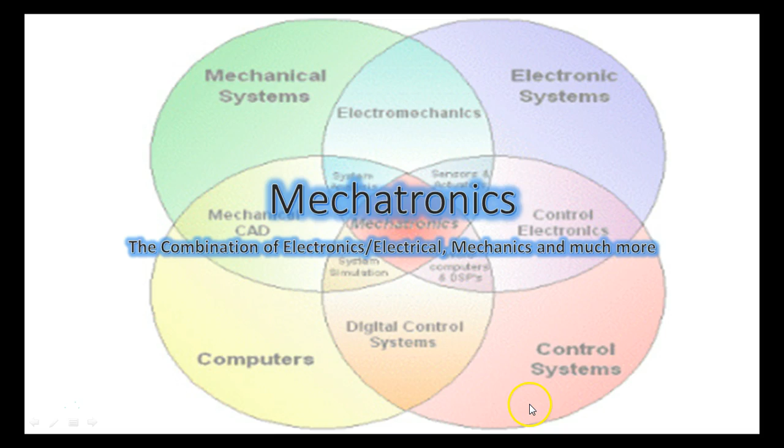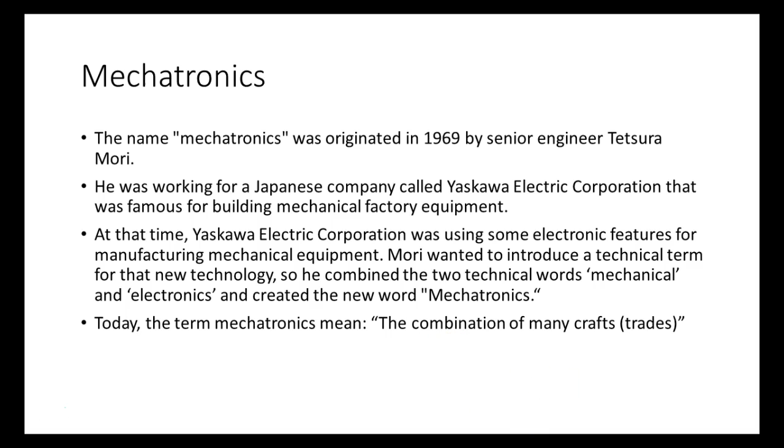So this is a little history. It was originated by Mr. Mori, from a Japanese company that dealt with electronics and mechanics. He was the first one to come up with this word. So originally that's what mechatronics was, a combination of mechanics and electronics. But it basically means it's a combination of a lot of many crafts, or trades.

So this is a cleaner one — this is the actual official logo for mechatronics. It consists of control systems, computers, digital systems, control electronics, electronic systems, electromechanical and mechanical systems, and CAD.

The only thing that we don't do in this class is CAD. You know what CAD is? What does CAD stand for? Computer aided design. 3D printers would be part of 3D modeling, which would be a part of designing with computers.

Used to, when I was in college and we took drafting, it was on paper and pencil. I remember when the college got its first CAD computer, and now you do all your drawing on a computer — it takes care of a lot of stuff for you.

It's one of the softwares they have to do the printers up there. Yeah, it's like a touch screen — you can scan stuff with it and then have a 3D model and rotate it, expand it. We were donated one, but we haven't got it going yet — a little Delta 3D printer over there. Yeah, it's a real neat one. It was given to us, but we don't have the software application to run it yet.

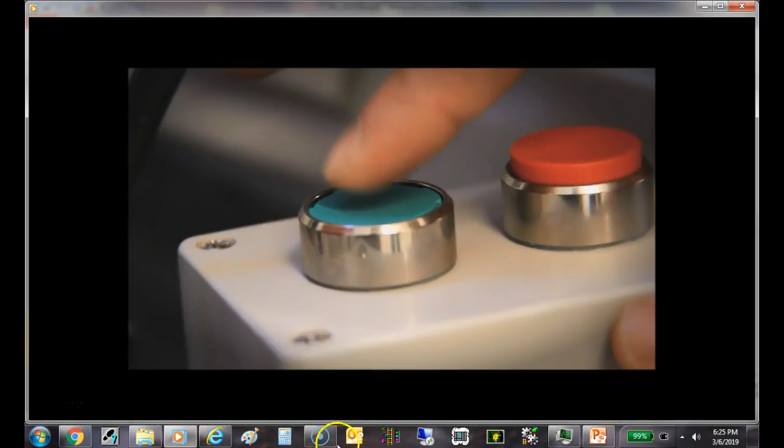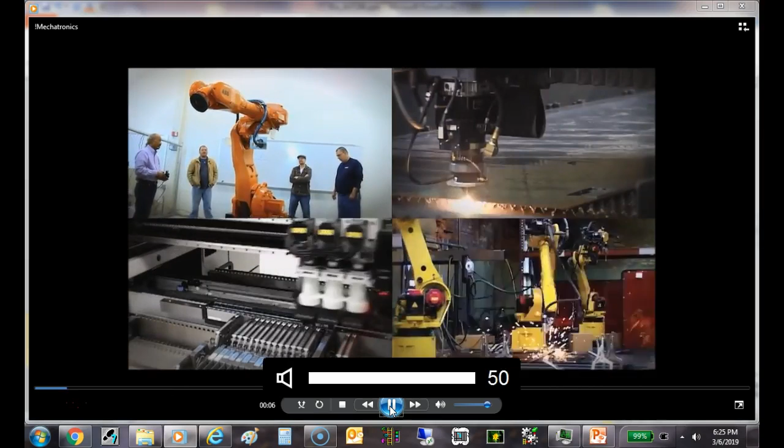Anything mechanical related, we get to play with it. Making things run, learning how they run, learning how to make them run. Every new project is a new challenge. This is a perfect option — I like the fact that you can actually get your hands dirty and work on stuff.

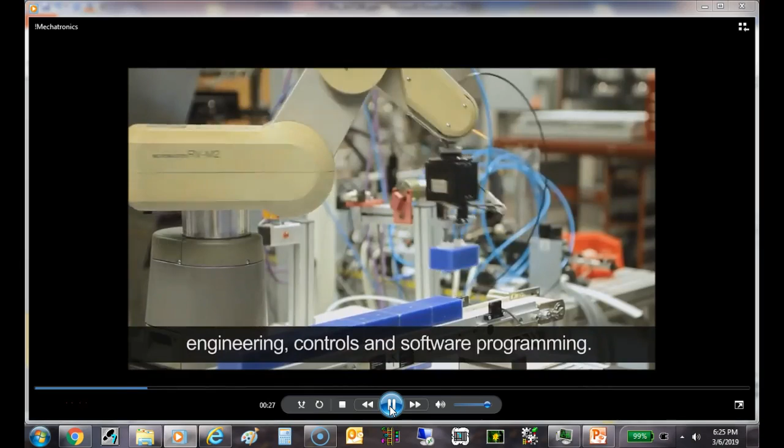I would like to define mechatronics as a broad combination of electrical engineering, mechanical engineering, controls, and software programming. Electrical, mechanical, hydraulics, and pneumatics. It includes motors, sensors, electronics, and computers.

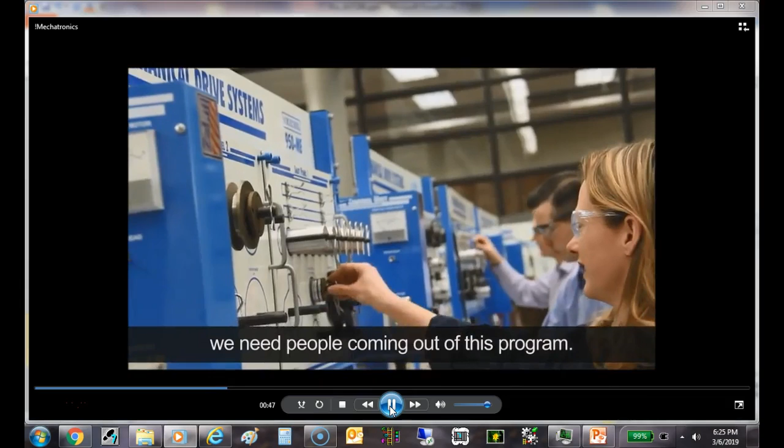The mechatronics program began because there is such a demand for these high-skilled jobs. Companies are begging this school, saying we need people coming out of this program. We're going to be picked up as fast as we come out. There are literally hundreds of thousands of jobs available for those in mechatronics.

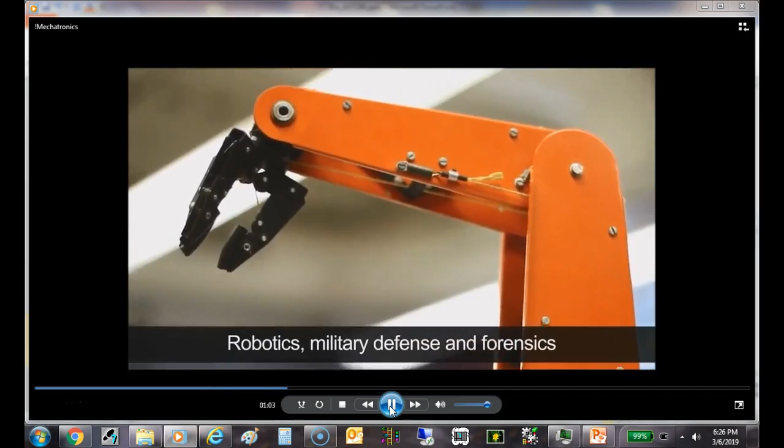All manufacturing is mechatronics nowadays — robotics, military defense and forensics, packaging, manufacturing, pharmaceutical, shipping and receiving, postal work, automotive. Mechatronics jobs are actually everywhere in the entire world.

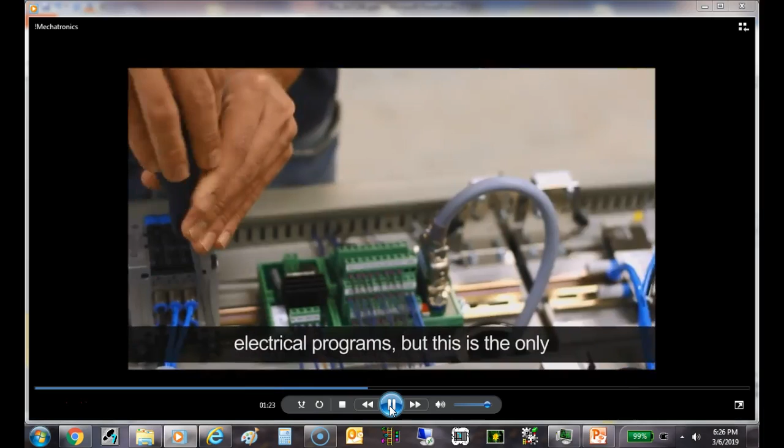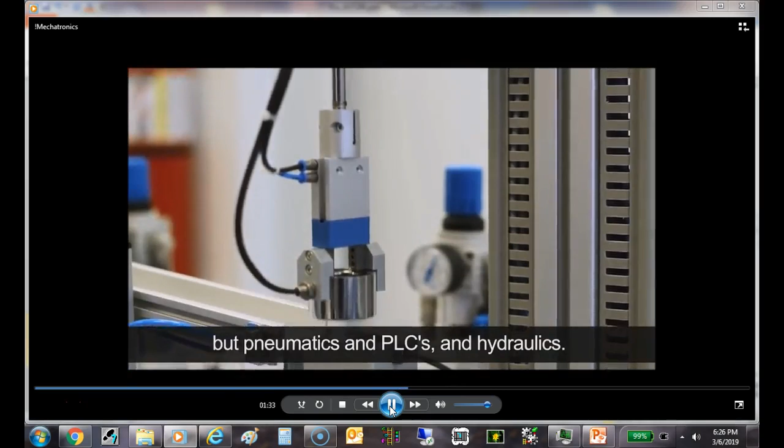There's manufacturing skill council certifications, and a Siemens certification. Different schools offer both of those — mechanical programs, electrical programs — but this is the only program which combines all the fields. Most of the jobs I saw that I applied for were asking not just for electrical skills, but pneumatics, PLCs, and hydraulics. This is a very challenging program, but I always tell my students, nothing good comes easy. It's a challenging field for people, but I think if you have the right skill set...

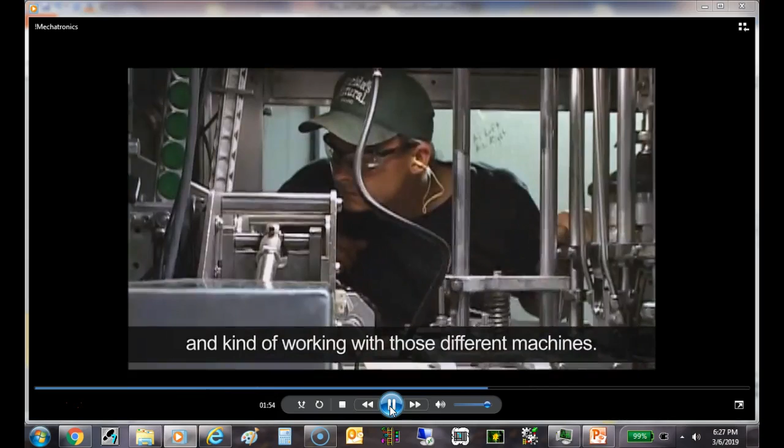Your favorite part of the program is actually working on the equipment in the lab, setting things up. Every lab you actually get to work, roll your sleeves up, being able to work with your hands and work with those different machines. Students get exposure to actual industry-level equipment: DC and AC trainers, mechanical vibration trainers, fluid power trainers, programmable logic controllers, and robotics.

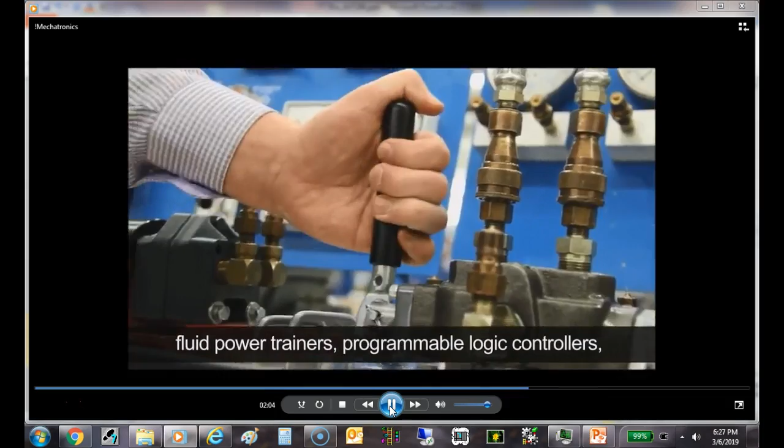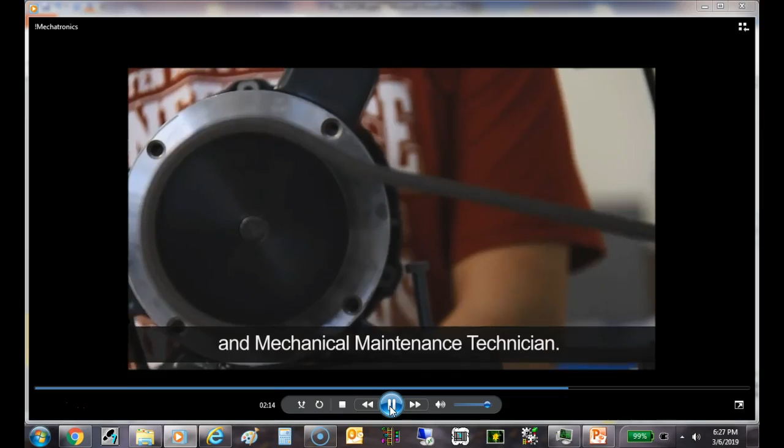How to set up a belt drive system, how to set up a chain drive system. The jobs in mechatronics mainly are electrical maintenance technician and mechanical maintenance technician. They can set up the robots, they can troubleshoot the robots. Starting salary for a mechatronics career is about $50,000, and it can jump up to 100,000.

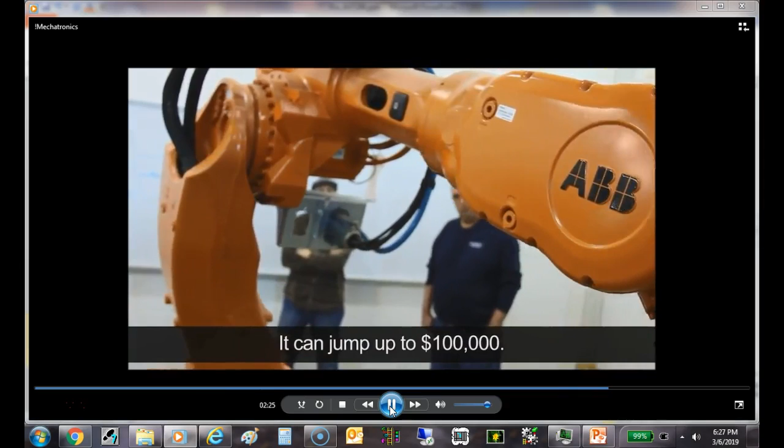I'm very confident with what we're being taught and the ability to take it out into the real world and use it to open doors that were previously closed.

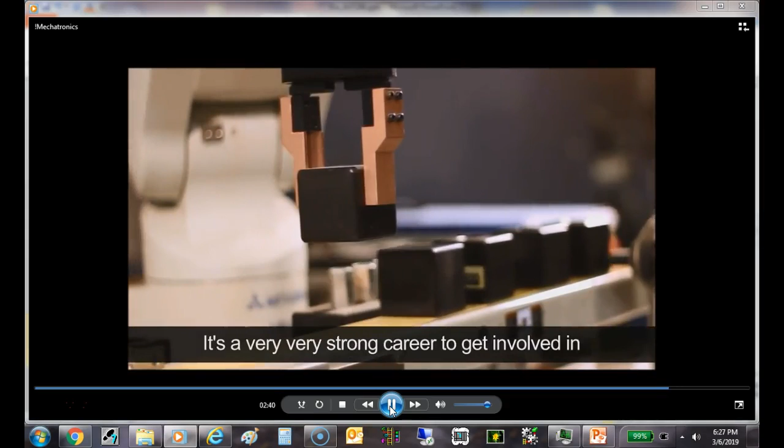I plan on getting a job in more of automation work, like defense contracting. One day be like Iron Man in the basement. It's a very strong career to get involved in, and will definitely be around for a while. Companies are going to rely more and more on people with these skill sets because that's where this industry is going. The skills I learned here helped me tremendously. If you're looking for a good job and a good future, you should join this program, and definitely there is a career there.

So mechatronics is about anything that deals with automated manufacturing. Fluid power is one of them that I left out, so we'll deal with some fluid power, pneumatics, in this class.

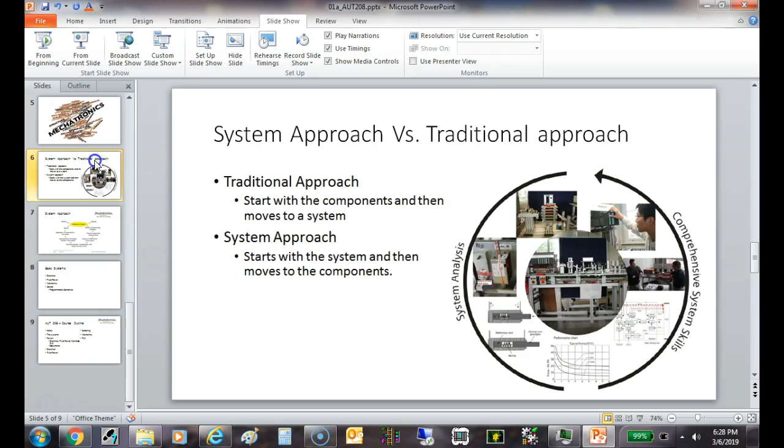So what we used to do, they call it the traditional method. We would start with the components, and we would teach how all these components work, all these sensors, how they work. Then we would move over to the system. The new approach is what we call the system approach, where we start with the system, and then we move to the components.

So when we take this class, our components, we're not really going to understand. We don't need to understand how they do what they do, we just need to know what they do, right? And if they don't do what they do - used to, when I first got into the trade, we fixed everything, down to the component level.

But that's back when you bought the first IBM computer running an 8086 processor, 8088 processor in fact. Only had 64K of memory in it. Used floppy disks, had a 10 megabyte disk drive. That computer cost $2,000 off the shelf, and it was the cheapest computer out there.

64 kilobytes, a 10 megabyte hard disk drive was in it, and it had a 5 1/4 inch floppy disk. $2,000, and a monochrome monitor, green on black. $2,000. So when those suckers broke, we fixed them. We used to teach a component level troubleshooting class for an IBM compatible computer, where students could actually figure out which IC was at fault.

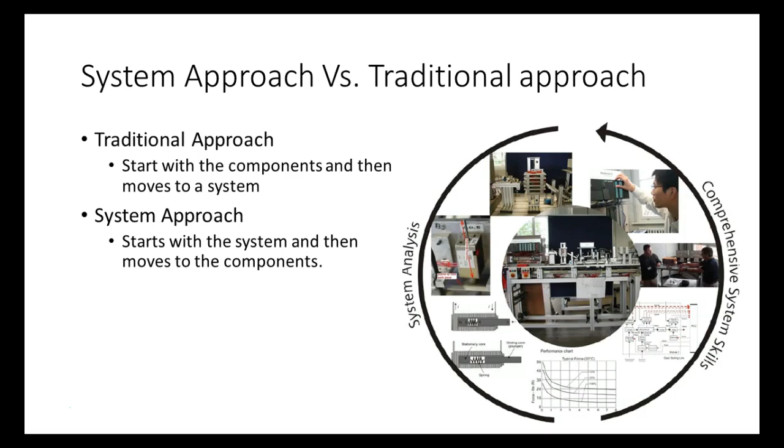But what we're going to do tonight is actually go over to the system, and we're going to see what both of our manufacturing lines do. We'll talk about what's going on, and then we'll learn more and more about the different components of the manufacturing lines as we come into it. What's nice is this is the Siemens approach, what Siemens calls the system approach. So the first thing we do in these classes is start off with the system.

The system. We start off with the system. And then we'll look at the different modules that make up the system. And then we'll start looking at the components on what they do. And then we'll look at physical.

And then over here is when we actually start doing what? That's when we actually break it and start putting problems in it. So what you'll find out as a technician is that you can't fix something if you don't know how it works in the first place, right? So we'll learn different techniques that Siemens uses as far as figuring out the sequence of events that a manufacturing line will go through.

So every manufacturing line is usually subdivided into, over here we call them modules. But even in Mercedes, they have certain sections that do certain things, and we just pass that vehicle between the different sections, right? You understand that? So we basically do the same thing here, but over on lines we refer to them as modules.

So we got this module that does this, and this module that does that. And we'll start off looking at individual modules. We'll figure out how they work, what they do, the sequence they go through. If you understand the sequence, if it breaks, if it stops working, you say, well, how far did it get in the sequence? And what's required to get it into that next step, right?

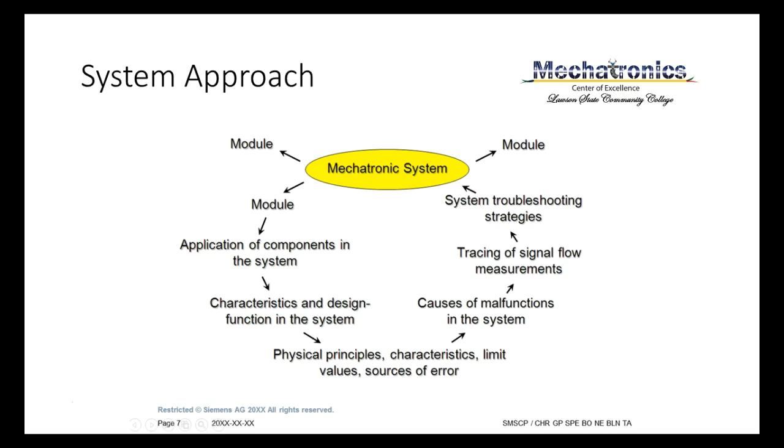Does that make sense? So this is Siemens. Siemens calls it the system approach, which most people basically do anyway. It's just that Siemens was the first one to put it on paper. So this is the basic makeup of our system.

We're going to look at electrical, fluid power. What's a fluid, by the way? Hydraulic is a fluid, but a fluid, yeah, anything that doesn't have a fixed shape and takes the shape of whatever it's in is considered to be a fluid.

For years, I thought fluids were liquids, but they're not. So any air. So we're sitting here in a fluid right now, right? Because air does what? And it easily moves. So the fluid power that we're going to deal with in this class is, we do have a hydraulic pump back there, but it started leaking, guys, so we can't use it.

And we're going to look at mechanics and then, of course, control. But the PLCs we're going to look at is not from a programming point of view, from what the PLC does in this class. And of course, you'll take classes in PLCs, and we actually offer 3 different levels of classes. I think

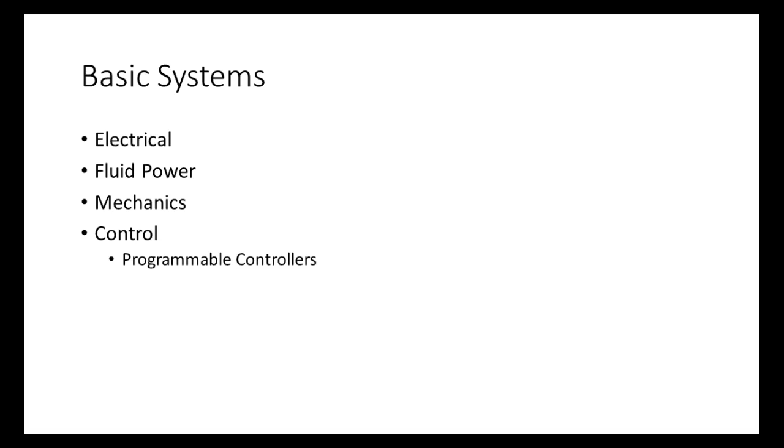Then we'll do both systems. We'll look at what the Festo line does and also the Amatrol line does. The Festo line right now is not really designed to be tore apart. The Amatrol line is, so our labs will be on the Amatrol line.

But we'll start off with safety. We'll look at the system. We're going to skip over. We're going to go over to the system tonight because the first lecture that we'll do online will be the safety. We'll look at the OSHA 1910 safety standards, and then also we'll look at lockout, tagout procedures. So we're going to do lockout, tagout in this class.

We called it a review, but we're going to actually learn enough about electrical. Most of y'all know, y'all all had DC at least, right? Everybody's had DC. Some of y'all haven't had AC yet, so go enjoy that class. You getting there yet? That's one of the harder courses that we teach here.

Fluid power, mechanics, PLCs, and then of course we'll look at the documents. Being able to read the documents that hopefully are provided with the manufacturing line, and I'm sure that a company like Mercedes, that was part of the bid process at U.S. Steel. If they bought something, they had to provide what? All the documents and everything that went with the item that they bought, including all the schematics.